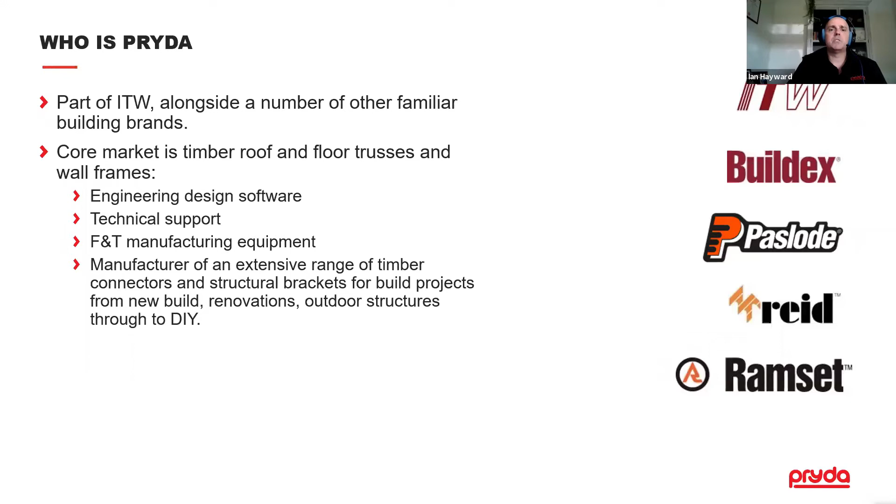Who's Pryda, if you don't already know? We form part of a business called ITW, which has got a broad range of recognisable Australian building names. Our core market is timber roof, floor trusses and wall frames. So we provide engineering design software, technical support, frame and truss manufacturing equipment, and we also manufacture an extensive range of steel timber connectors and structural brackets for building projects and for also DIY and outdoor structures.

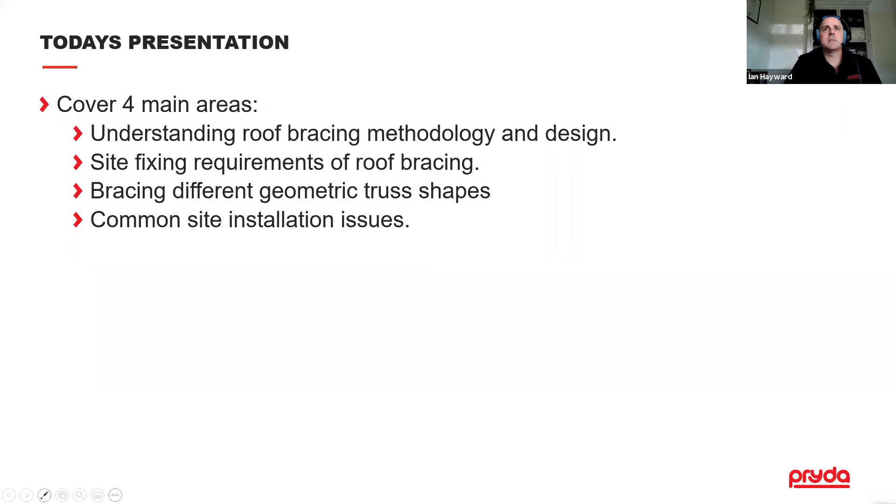Today's presentation, we're going to cover four main areas. The first part is really just understanding a bit about roof bracing methodology and design. Then we're going to move on to some common site fixing requirements for roof bracing. Then we're going to look at some things outside of 4440, which is some different geometric truss shapes and how to brace them, and then look at some common site installation issues at the end of the presentation.

If we look at the legislative requirements first, the building and design or installation of trusses is governed by 4440. It's called up in the National Construction Code, and it's a standard that governs timber roof trusses, timber nail plated roof trusses. So it covers certain building classes, class 1, 2, 3 and 10, and also light commercial. You can use it to get some bracing designs for light commercial structures.

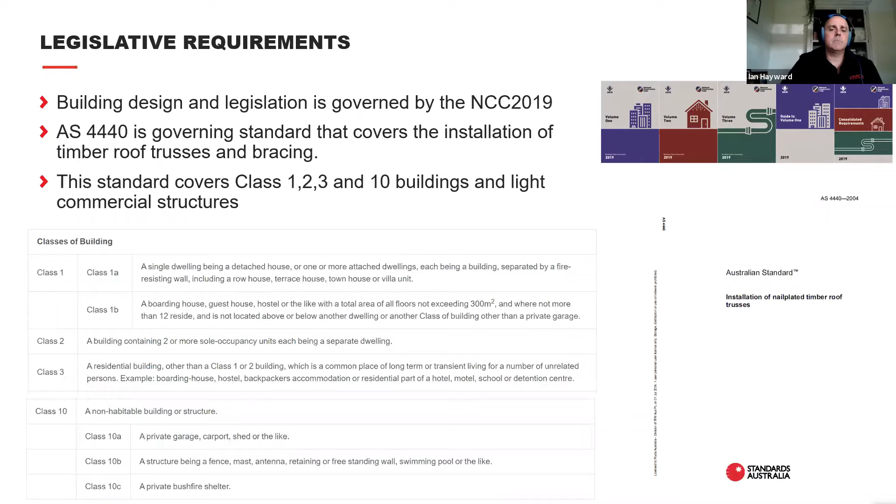What are the scope limitations? These are sort of key things to keep an eye on, because outside of these scope limitations you normally need some engineering guidance. So 4440 has these sort of spelt out in the application of the document. The maximum roof pitch is 45 degrees, so you try and keep the pitch or the bracing below those levels. If you get trusses outside of that, it's always a good idea to source engineering advice.

Maximum truss span of 16 metres. Once you start getting longer span trusses, the compression loads and the chords build up, and so there's a cut-off point at 16 metres for the application of 4440. Truss spacing, so 900mm for tile roofs or 1200mm for sheet roofs in N3 or lower. The reason for that as well is the wider the truss spacings are, the more load it has to carry, the higher the compression forces are in the chords, and the more attention needs to be paid to the bracing and application.

And you're not allowed to use it in snow-loaded areas. Again, seek engineering guidance when you have those sorts of situations, because snow loads can be quite high forces that are applied to the building. It could be anywhere from 100 kilos a square metre to 250 and higher. Again, these create substantial compression loads in the chords, and there needs to be a little bit more attention to detail for the bracing in those types of buildings.

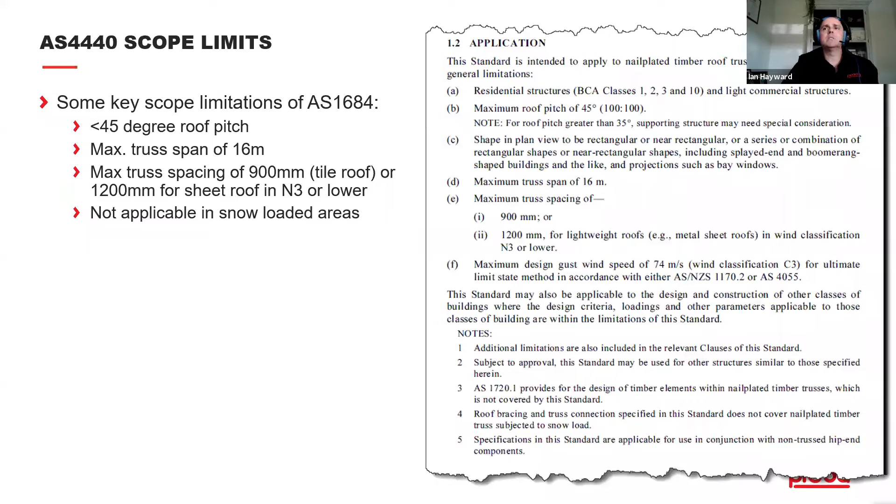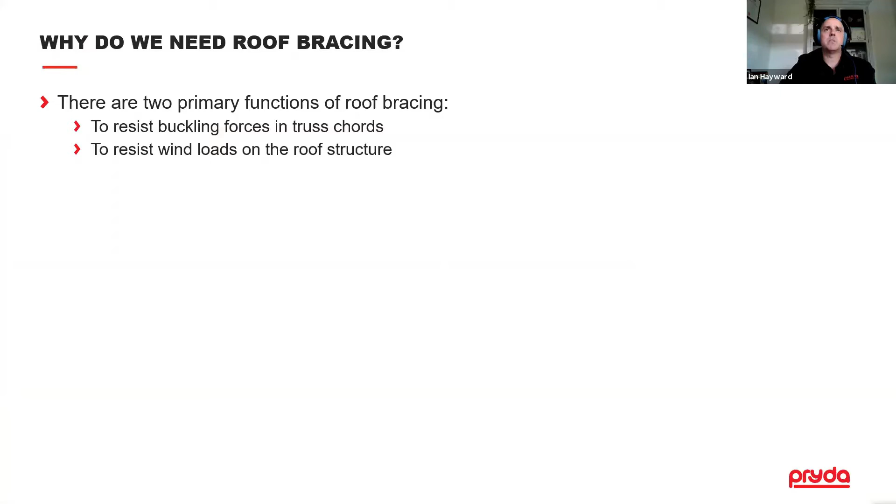So if we just move on to roof bracing methodology and design. The two primary functions of roof bracing is really to resist the buckling forces in the truss chords and to resist the wind loads on the roof structure. We're going to look at both of those in a little bit more detail in the next few slides.

Buckling forces: when you subject a member to compression, it will tend to buckle in the direction of the narrowest width of the member. The more slender a member is, the more susceptible it is to buckling. As you can imagine, with trusses, they're all made of sort of 35mm wide material, so they're actually quite prone to buckling. A good illustration of buckling in action is when you get a ruler and you press it on the end - the tendency for it to push out sideways in the direction of the narrowest width is buckling in action.

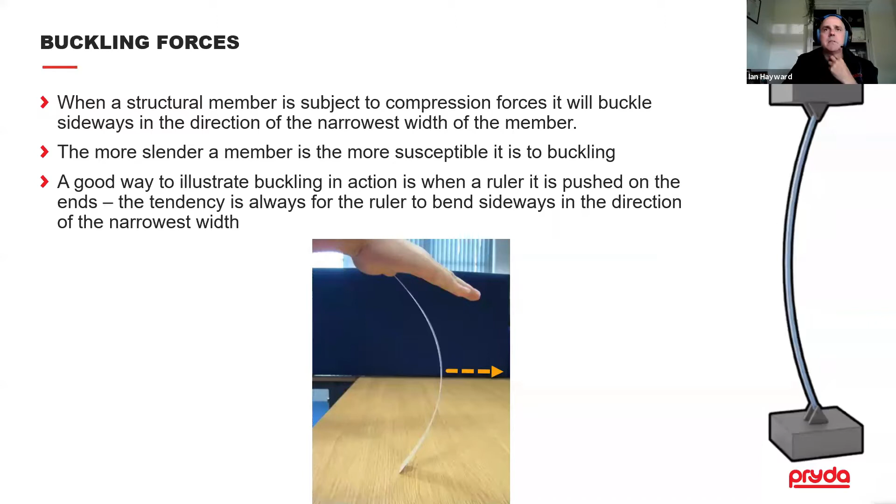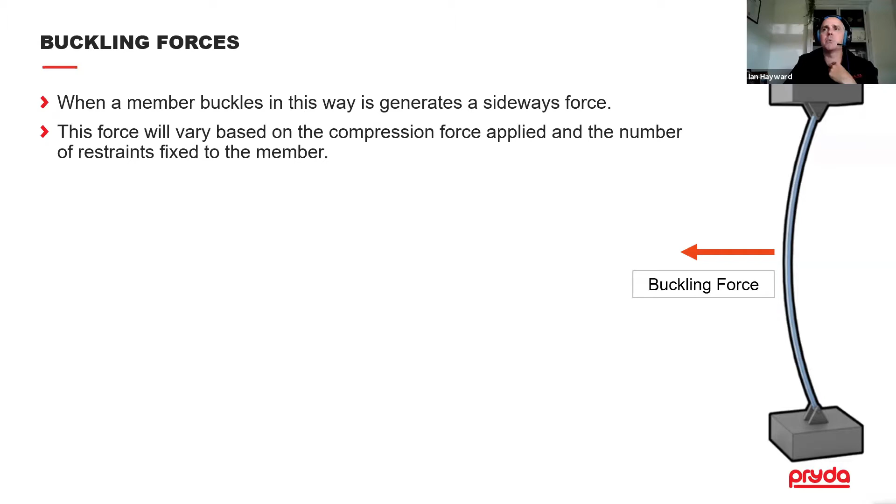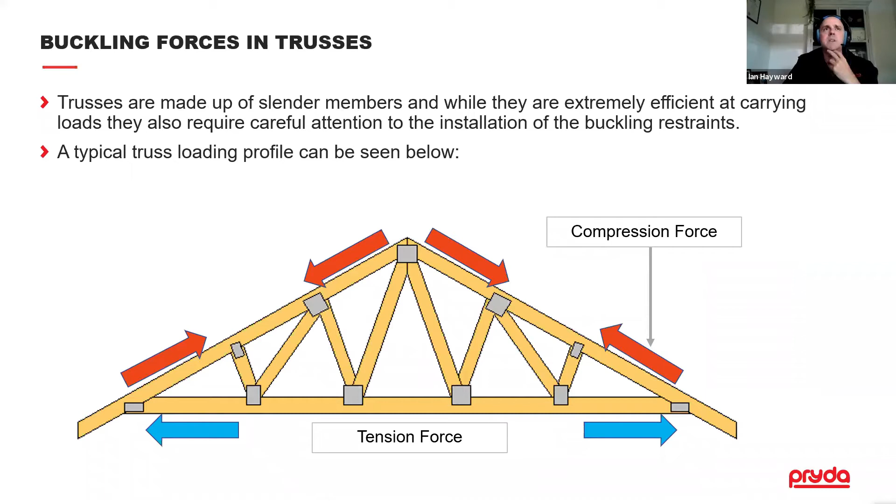When a member buckles, it generates a lateral force, and that needs to be resisted by the bracing system - that's one of the primary functions of roof bracing. If we look at a typical truss, normally in the top chords you have these large compression forces, and normally in the bottom chords you have a tension force. Those forces need to be resisted.

You get the opposite for wind uplift. Even though you've normally got compression forces in the top chords and tension in the bottom chords, when you get a higher wind uplift, that can actually reverse, so you can get high compression forces in the bottom chord and high tension forces in the top chord.

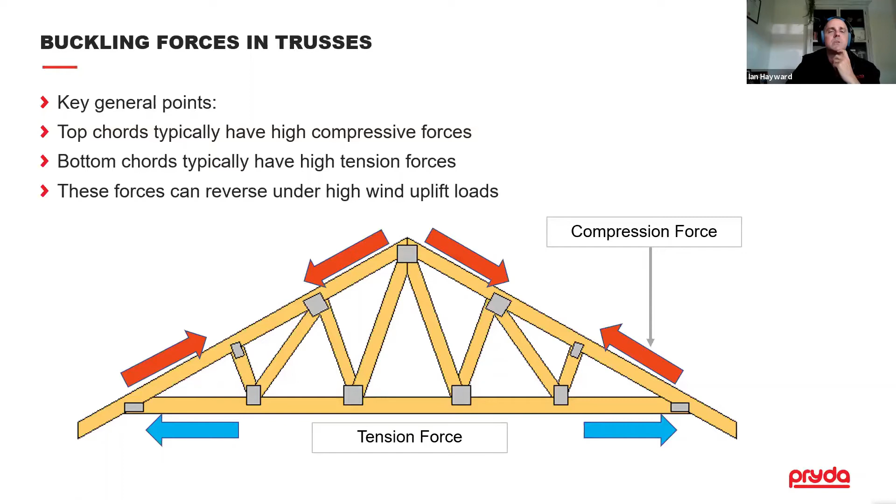Another key thing to keep an eye on is long webs. Slender members like webs are subject to compression forces, and sometimes when they get long enough they may need a buckling restraint, either a mid-height tie or some stiffening, to make sure they don't buckle and fail.

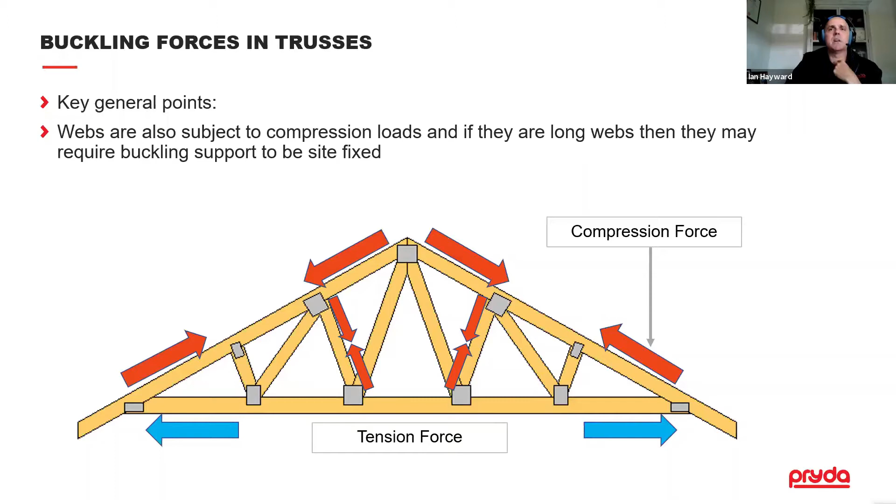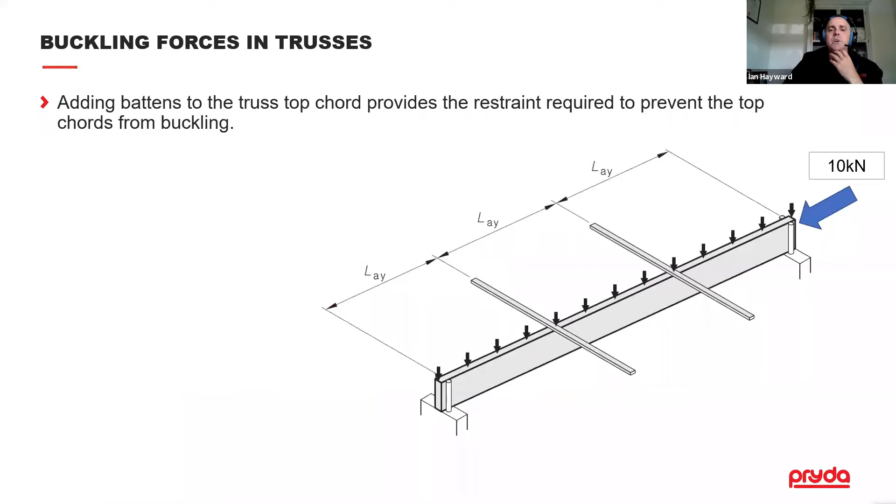The way members in a roof truss system work, once a compression force is applied, the restraint system really comes through the battens. These battens have to be strong enough to resist the buckling forces applied. For loads generated, say a 10 kilonewton compression force in this member, there's a formula in 1720 to calculate the amount of buckling force directed through these members.

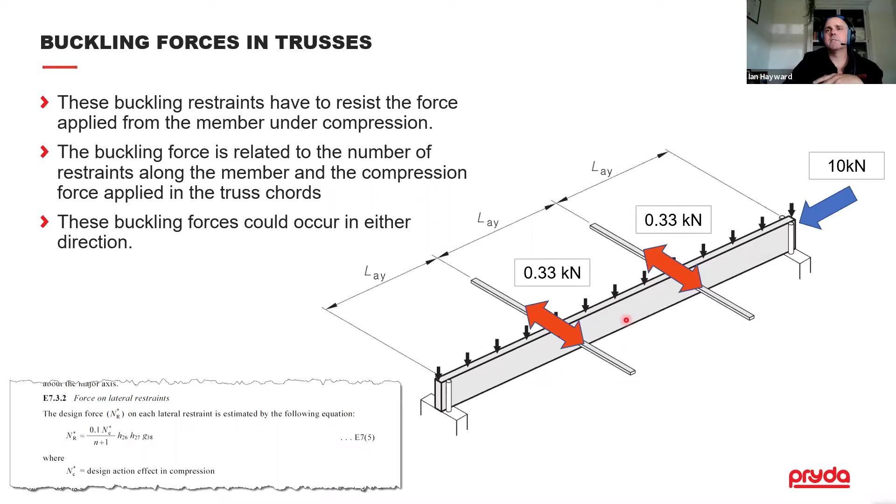It's important to note these buckling forces could go in either direction, so it needs to be restrained in both directions. Another key consideration is that these forces are generally cumulative - you may get the situation where trusses are all buckling in the same direction, and the buckling forces add up for each truss in the direction of the run.

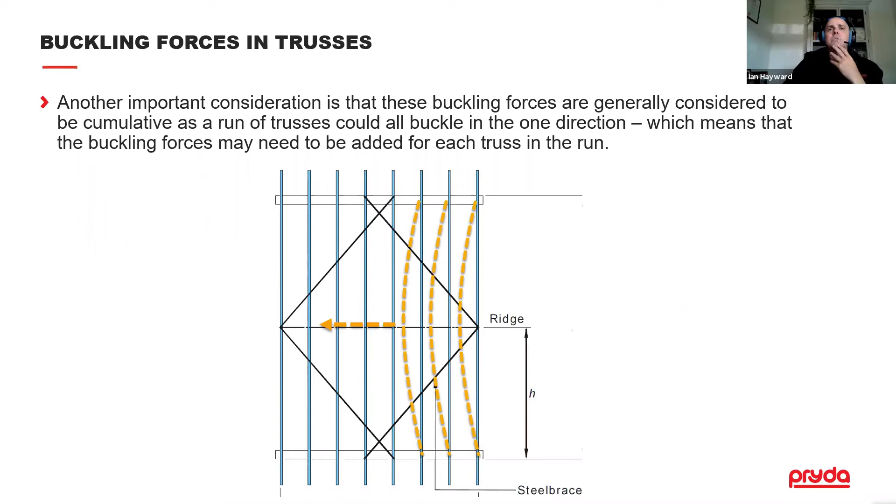The buckling forces are applied to the battens, which are fixed on here, and these forces transfer through the battens, and then when they reach the Speedbrace, they get redirected out to the external wall. These two bits of Speedbrace take the buckling forces in this direction out to the external walls.

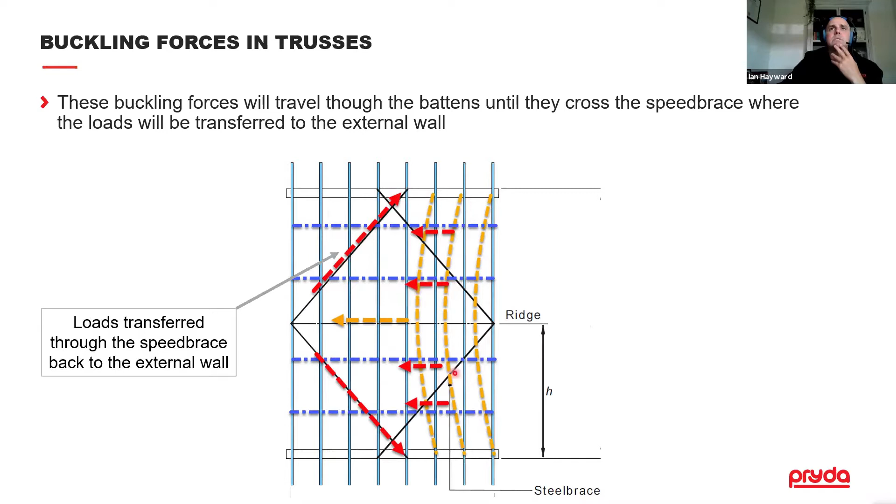Now we'll move on to the wind loads. Part of the application of roof bracing is to resist the buckling forces, and the other part is to resist the lateral wind loads on the building.

You can see here the horizontal wind loads on the roof structure. Part of that comes down into the ceiling diaphragm, and from the upper part of the wall it also comes up into the ceiling diaphragm. Then the top part of this roof gets resisted by the Speedbrace.

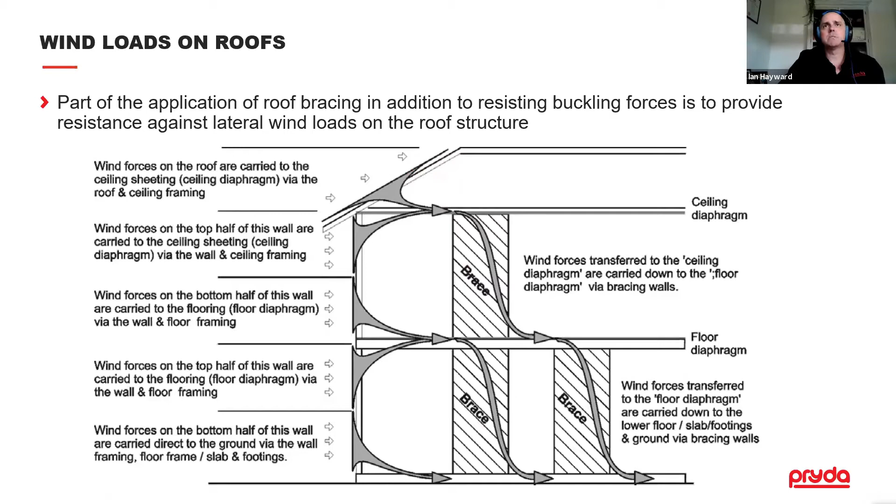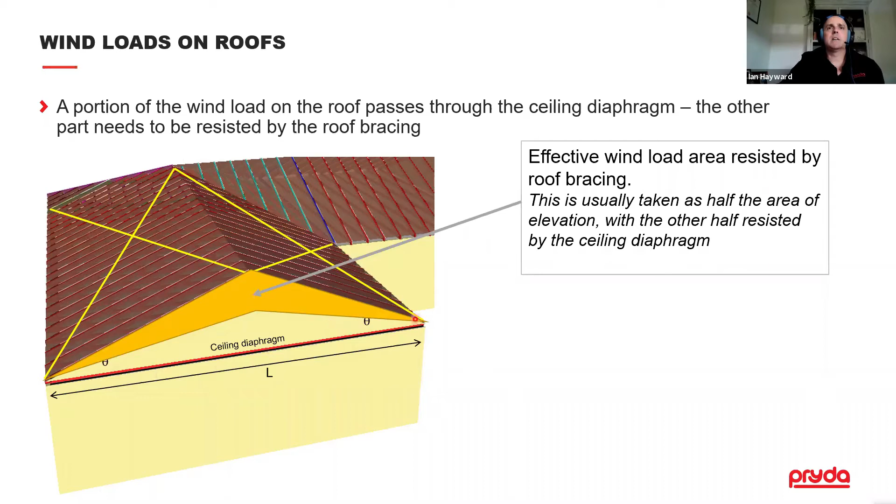Most of the load actually goes through the ceiling diaphragm. This portion down here comes in through the ceiling diaphragm, stabilised by plasterboard, which sits on the bottom chords of the trusses. If fixed direct, that provides the bracing system at the ceiling diaphragm level. The top chord bracing up here is purely for the shaded part of the load, which comes through the top of the roof.

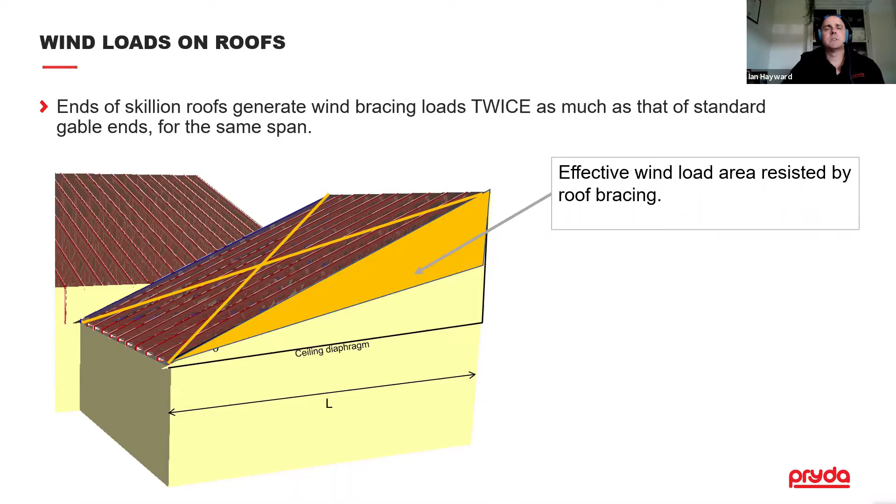Mono trusses tend to have slightly higher loads based on the span because you don't get the reduced area - it keeps increasing as the truss increases in depth, so you may get slightly higher wind forces on a mono truss. Ones with stub ends increase it again because of that starting depth at the heel, which can increase the forces on the building.

A key point for roof bracing: speed brace can only carry load in one direction, that's tension - it can't carry a load in compression. So it's important to always have speed brace installed in a cross configuration to make sure it can cater for wind loads from either direction.

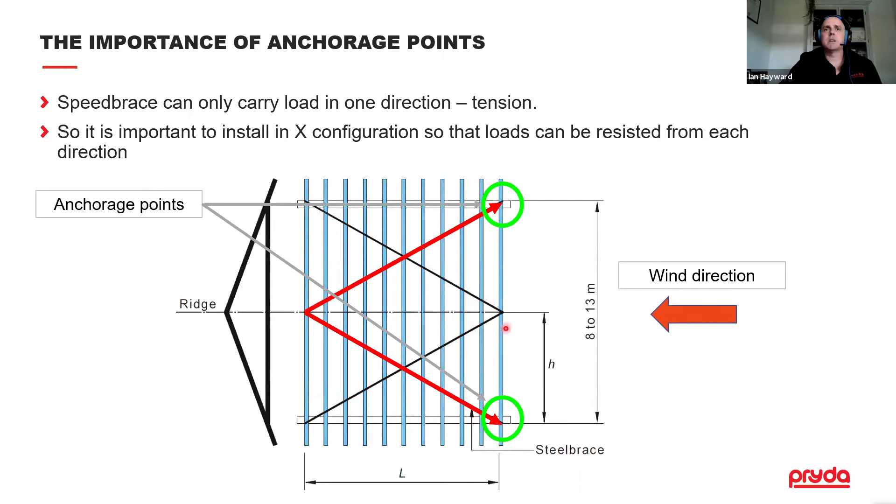Wind direction coming from the right-hand side gets directed through the battens and then taken down by these two bracing runs out to the anchorage points, and these effectively become redundant for that wind direction. When it comes from the other way, then these two become redundant, and these two, once highlighted in red, become activated.

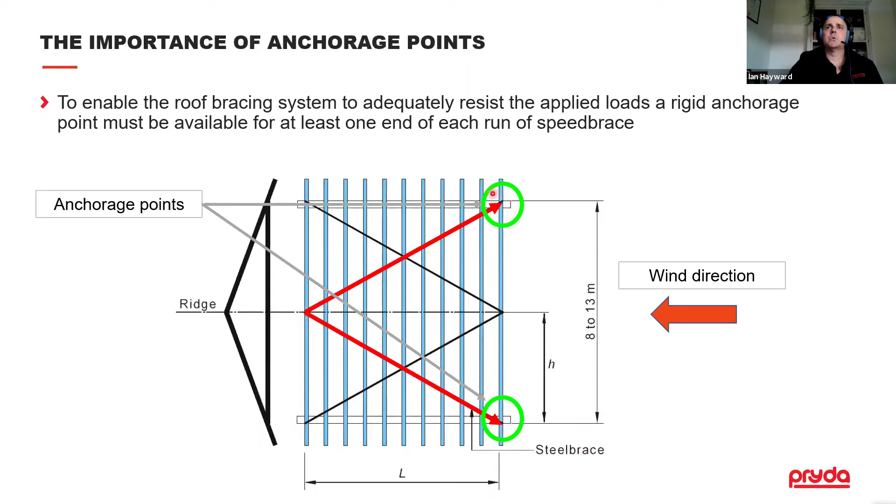With speed brace, it's got to have a rigid anchorage point at one end. Usually the apex point isn't considered an anchorage point - it's where it hits a wall or a rigid point that is considered anchored.

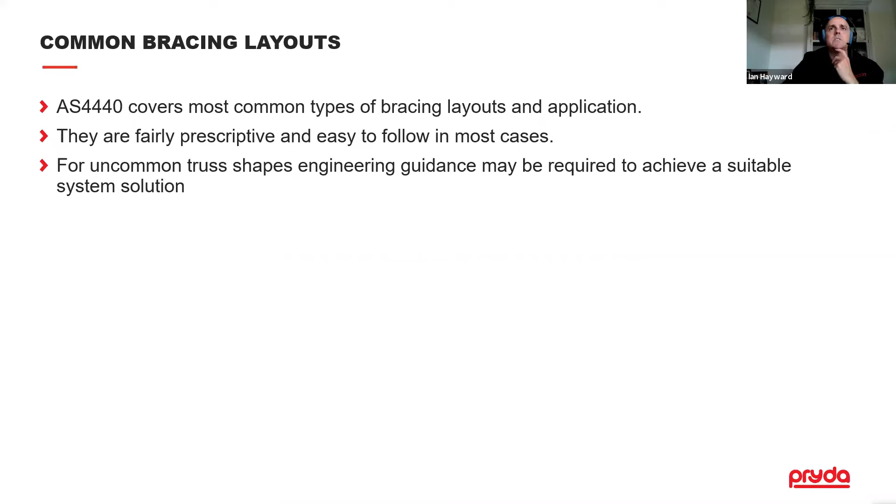If we look at some common types of bracing layouts, they can be varied. It would probably take another full session to cover common bracing layouts, but AS 4440 covers most of the common types, and it's fairly prescriptive and easy to follow in most cases. For uncommon truss types, we'll cover that later, but sometimes it may be an idea to seek engineering guidance for complex truss shapes that may need specialised bracing. But 4440 is pretty standard - you've got your cross bracing in X's on both sides of the ridge line.

The only change is when it gets up to 13 meters, there's a requirement, because the wind forces and buckling forces start to increase, to have additional bracing bays established at 13-meter centres. They're generally single runs of speed bracing crosses with solid compression nogging blocks. The key detail is to make sure these bracing runs line up on each side, with the compression block directly running between them.

The main span of the trusses is also braced in the normal way, and it may be single or double based on the span of the truss, the wind loads, and the pitch of the roof.

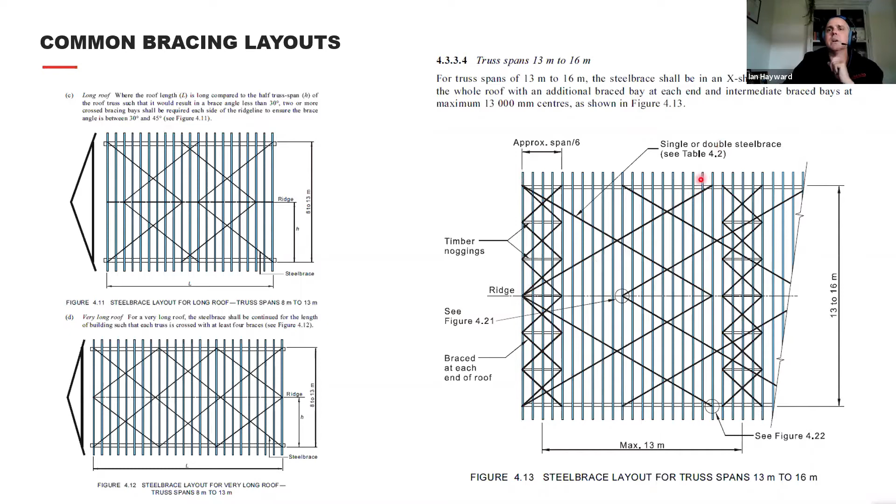So sometimes you don't always have to brace every truss in a job. The ones that often don't require bracing are hip trusses, because they're braced by the supported creeper trusses coming in from each side. TGs and TSs generally don't require it, because the horizontal top chord is restrained by the jack top chord flying over the top.

Valley trusses basically sit on top of the standard trusses, so there's less buckling force in those particular members, so it's not often required to diagonally brace those. The bracing usually runs on the underside of the valleys across the normal run of top trusses.

Boomerang girders are braced by trusses coming in at equally spaced centres on each side, so there's not generally the requirement to brace those boomerang girders.

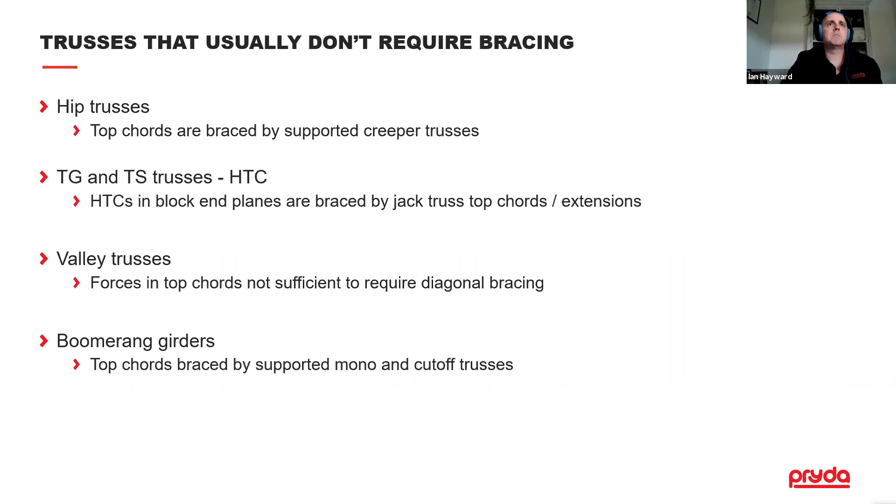So I'll have a look at some of the site fixing details. These details are generally contained within the 4440, covering most of the connection types used on site. It's important to note that the speed brace has to have at least one minimum effective anchorage point to be compliant.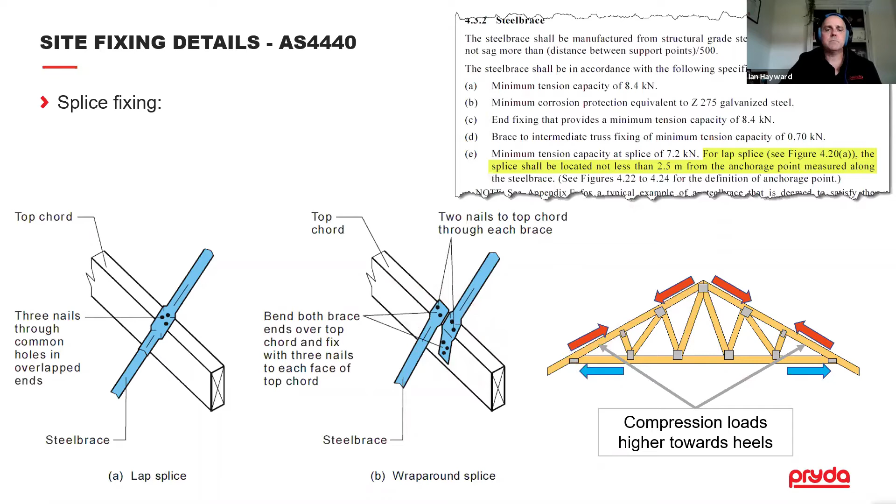Apex of the truss, pretty standard detail - again, the 2 nails and 3 nails down the side face.

When you fix to wall plates, you've got to keep this angle - this is a real critical one, less than 45 degrees. You don't want the speed brace dropping too sharply over the top of the truss. Again, 2 nails to the side of the top plate, wrap it underneath, and 3 nails on the underside.

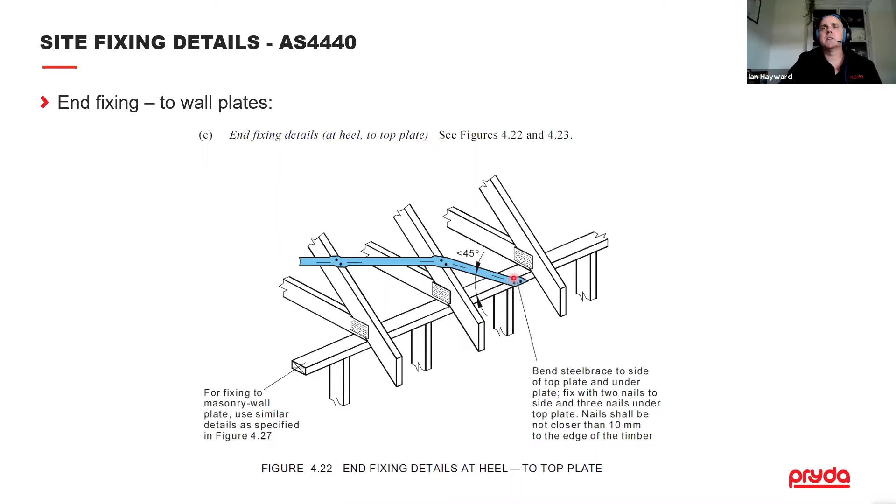There are also some alternate fixing details for those types of connections. Here's one which is good to use - basically 2 nails, 3 nails down the side face, and then a compression block in between the trusses, and this compression block should be on the side of the truss where the speed brace is running. You shouldn't have it on the other side - it should always be on the direction in which the speed brace is running.

And then you have 2 multi-grips fixed to each truss heel. As the load comes onto this truss heel, the truss heel will tend to try and rotate, so that compression block holds that truss heel in place and transfers the force into the wall plate. That's a really good connection detail for steel beams too, because you don't have the opportunity with a steel beam to fix underneath the top plate, so you can put that type of fixing detail in place.

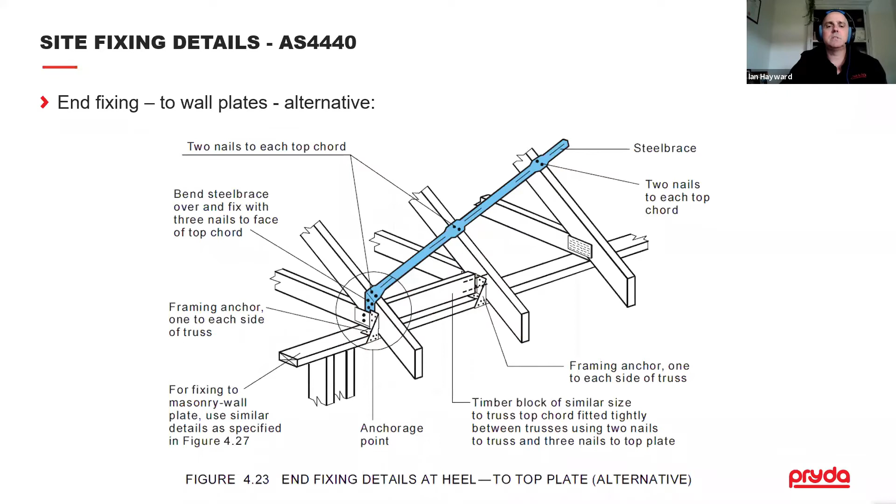End fixing - you can also fix the bottom chords of girders because they've got girder brackets and truss boots which can take these loads from the bracing system and direct them into the bottom chord of the girder. That's considered to be an anchorage point as well.

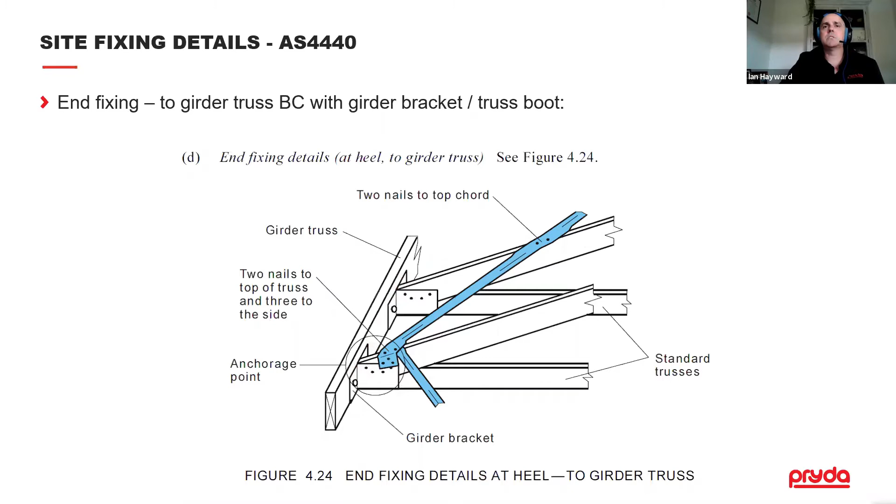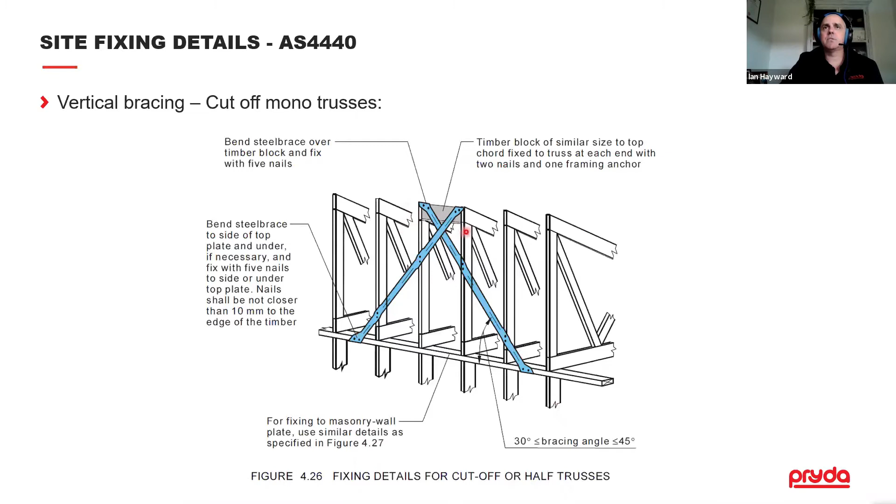Vertical bracing, another one that's commonly missed on site. When you've got cut-off trusses or mono trusses, you should have bays of cross bracing at the vertical ends of the trusses. And when you've got brickwork, you can't wrap it underneath and there's not enough fixings on this lower wall plate, so you can install a 90x45 timber block, fix it off with nails or screws, multi-grip each side, and then you've got enough fixing of nails on these edges of the blocks to stabilize the connection.

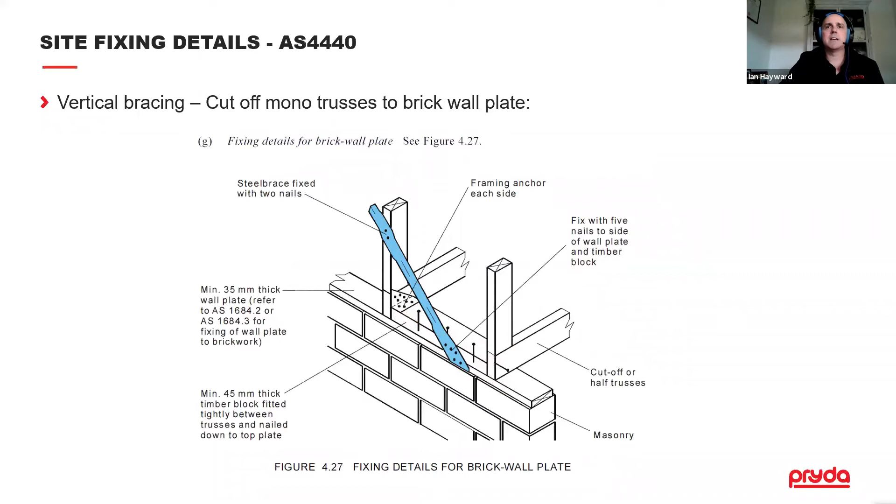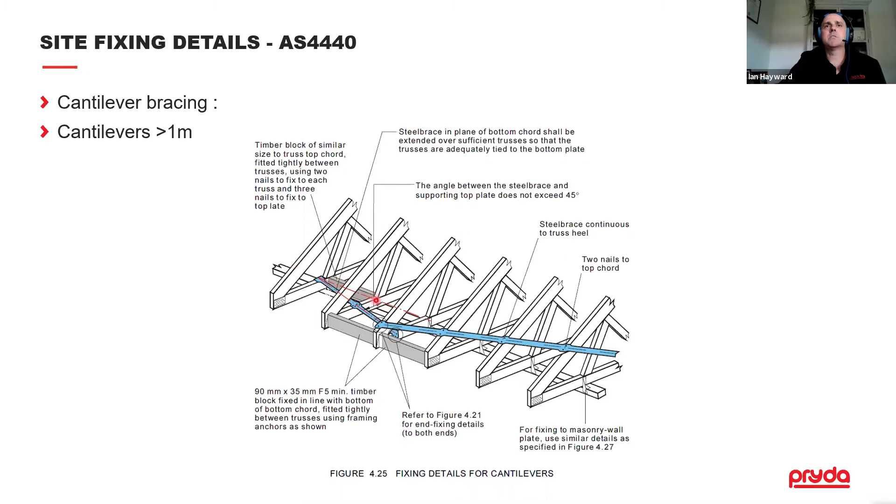Cantilever bracing - generally you're only required to brace cantilevers greater than 1 meter, but these are the sorts of details the standard provides to run the bracing out and then back to the wall. So it directs those forces with this secondary bit of speed brace back into the wall. And again, you can see this compression block in place to direct it in the direction of the speed brace that's running to direct those loads into the wall.

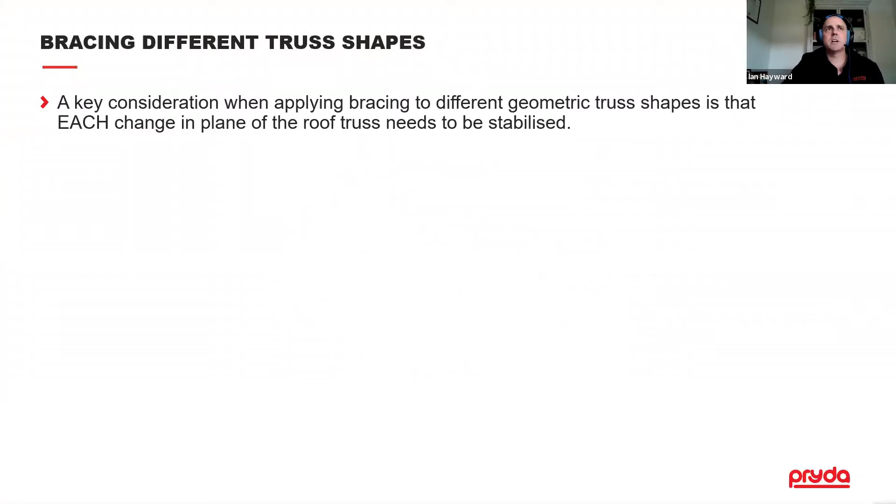So if we look at some common different truss shapes and how to brace them, the key thing to remember when doing different geometric truss shapes is that each change in the plane of the roof truss needs to be stabilized. If we look at a normal standard truss, you've got two bracing planes up to the apex and then down to the heel.

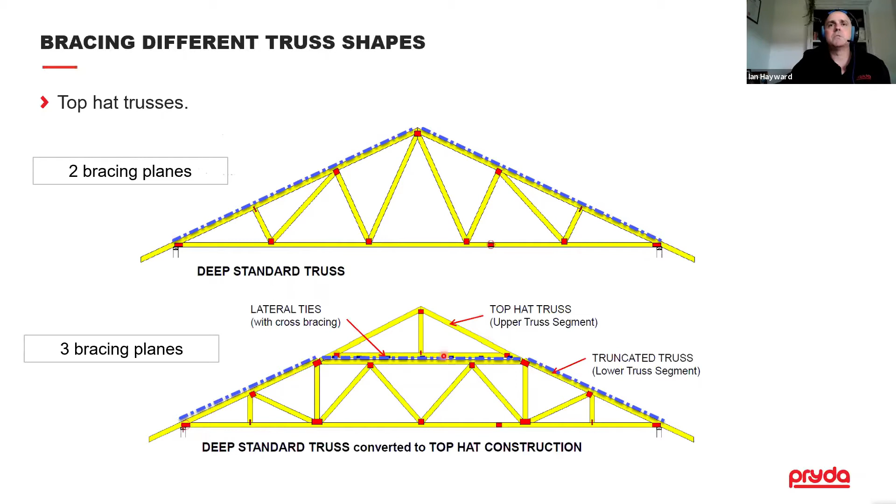So only two there. When you have a truncated or a top-hatted truss, now you've got three. You've got this top plane that runs across the horizontal top chord, then down the other side, and most of the compression load goes through that blue line. It doesn't actually do much - the top hat truss is just sitting on top, not doing much in terms of performance. All the loads come through this horizontal top chord, so you've got to make sure that that's stabilized adequately.

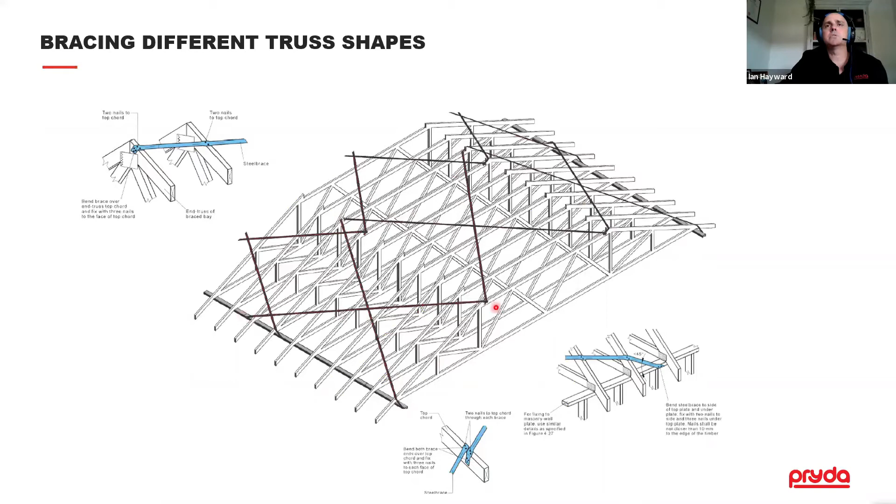So you can see here these bays of cross bracing across the horizontal top chord that run out and connect with these sloping top chord bracing links. So put the bracing in place, and then of course you need your battens on top of that to provide your buckling restraints, and then you sit your top hats on top. A good idea is to just extend these overhangs on the top hat trusses that you sit on top, so you've got a positive fixing between the valley truss and the truss underneath.

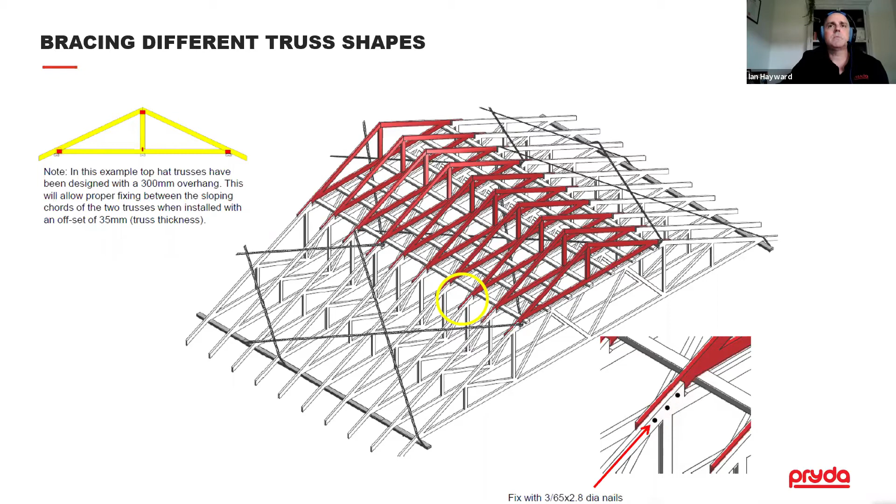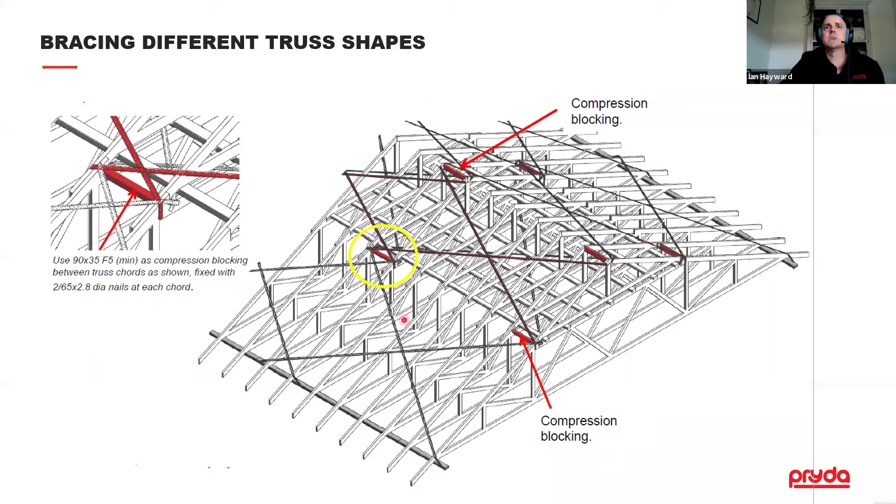The other thing we recommend highly with these types of connections is to offset where the bracing runs lie, because if you try and tie all this into one truss, it gets a bit messy trying to nail and fix these. So if you just separate them with one truss apart and put a compression block in between there, that's usually the best application for these types of bracing runs. You can see these compression blocks sitting at the intersection from where this horizontal top chord bracing meets the sloping top chord bracing on the outside.

Cut off mono trusses, so we covered this before. You can see bays of cross bracing at the high end, and if there was a stub end at this end, you'd have to have it at this end as well. They generally meet at where the roof bracing intersects with the apex of the truss. So you've got one here, one there where this cross bracing comes in, and then one at this end, so the bracing gets directly transferred into this vertical bracing at those high ends.

And normally you'd have this compression block. There's only one shown here, but if you had this bay over 2 or 3 trusses, you'd have to compression block between these points where the vertical bracing is - a continuous run of blocking between those points. And here you can see some typical applications of cut-off monos.

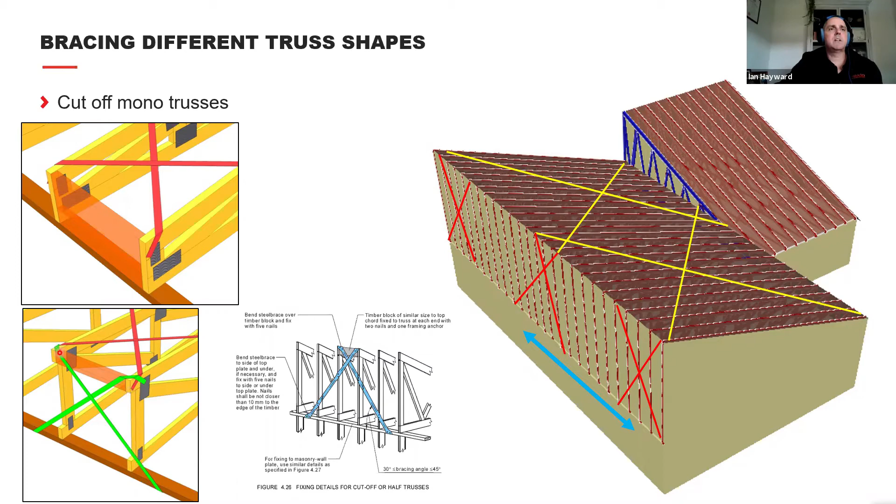If the cut-off mono is quite short, less than 300, you can just have 2 rows of solid blocking there and just brace out to the ends of the truss. If the stub end gets above sort of 350, 400, then you'll have to instigate this cross bracing at the wall.

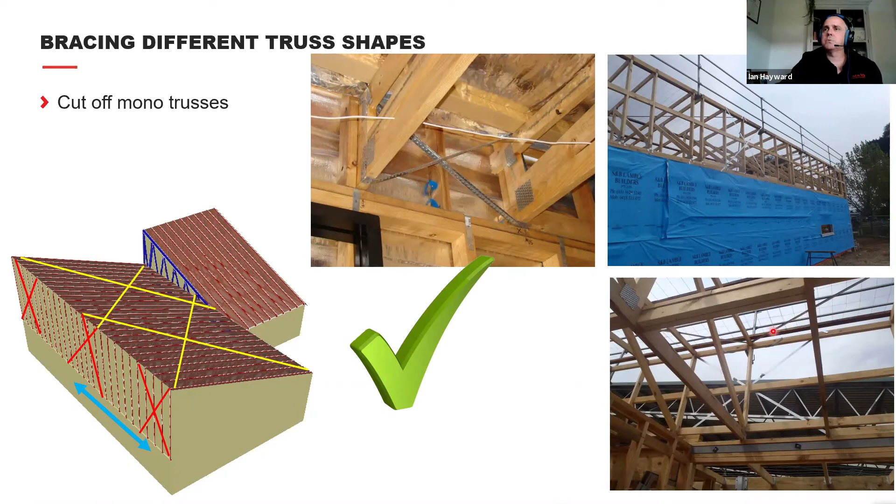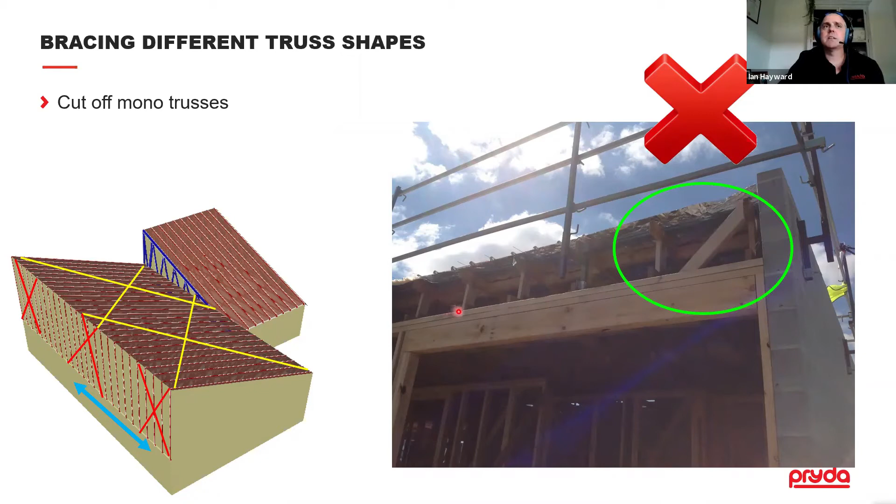Some typical examples you can see from site: cross bracing in place as per the details. You can see one here with cross bracing all fixed off nicely, and another one here - that's it in application. You can see the top chord speed braces coming in at the top here as well, and so that all goes in well. Where you want to avoid is these struts or missing bracing on these ends, because there's nothing there really to resist the pulling force that comes in from the brace on the top chord.

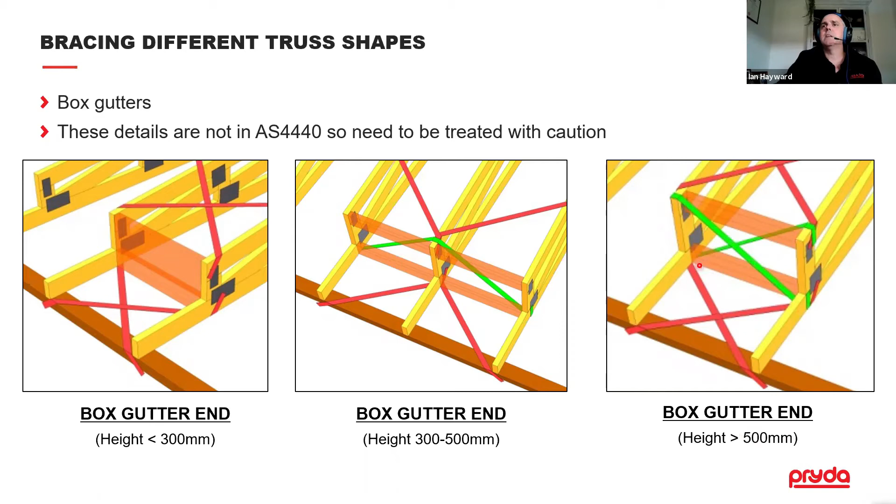So the loads come in through the speed brace, directed through the compression block, and then back out to the wall. And you can see different heights - this one's less than 300 millimeters, so you can get the compression blocking. When you've got 300 to 500, you can have 2 blocks and some bracing input. And then if you've got greater than 500 mil, again you can run with this cross bracing with some blocking at the top and the bottom level.

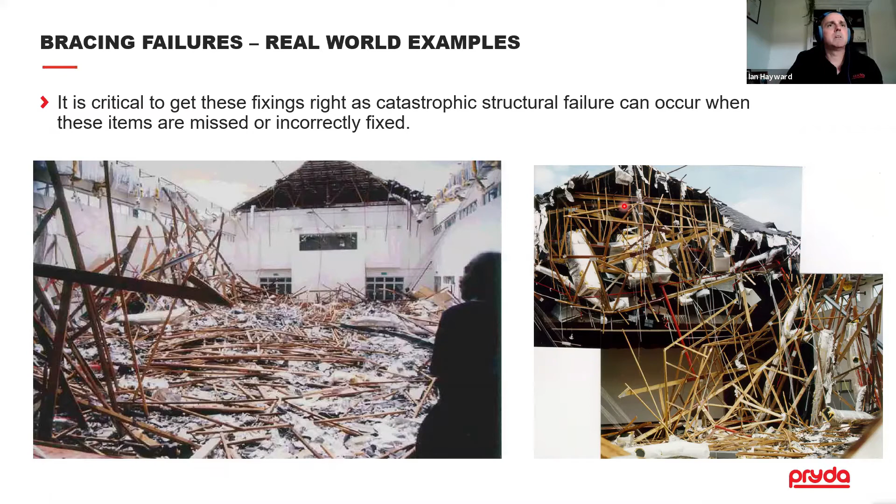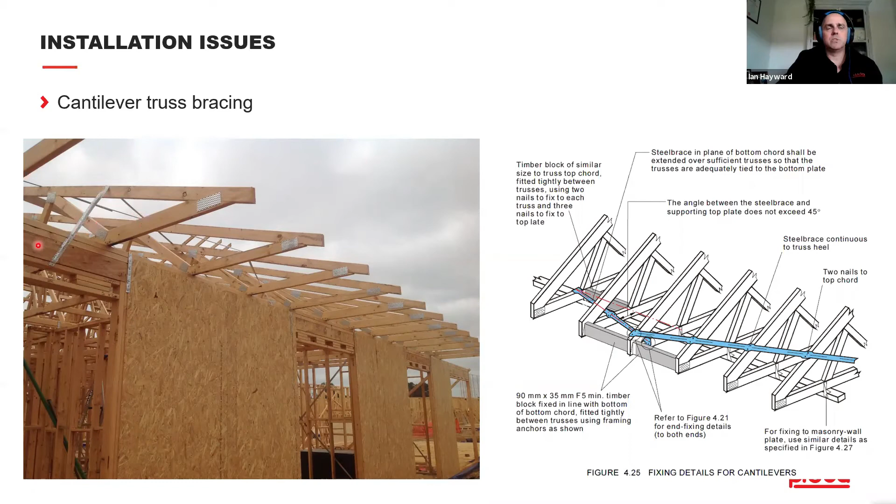What you should try and do is either brace out to the ends and brace it back to the wall, running the bracing out to this end and then back into the wall. Or if it's less than 1 meter, you can just run it over the top of the truss and down through the open space in the void here, directly down out to the wall. That saves you having to hook down at this sharp angle - just run it straight down onto the wall as long as your cantilever is less than 1 meter.

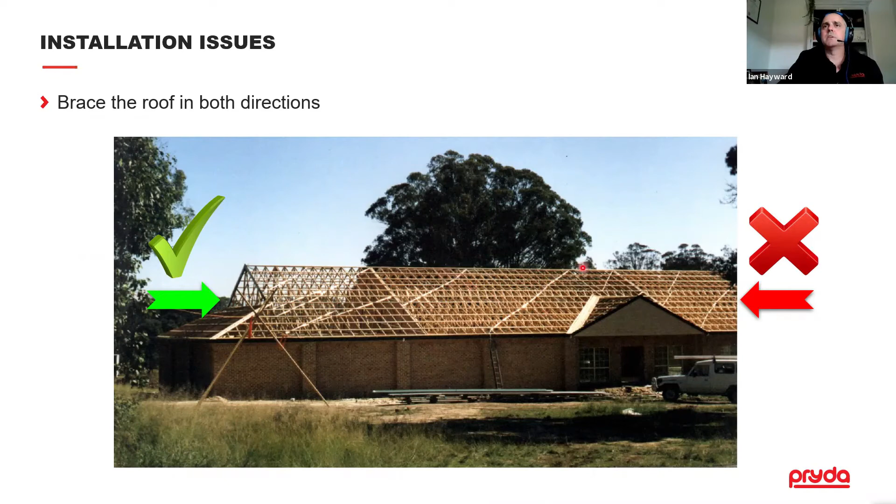Make sure you brace in both directions. You can see a job here where I've got all the speed brace running in one direction. If you've got a wind load from this way, everything's great. But a wind load from this direction, you're in trouble, because as mentioned before, it only operates in tension. So all of these braces become ineffective once you've got a load from this direction.

Use the correct end fixings. They're pretty specific, the details in 4440, and they cover most of the common applications. You just need to get these site fixings right - just lapping it onto the top plate with one nail is not cutting the mustard.

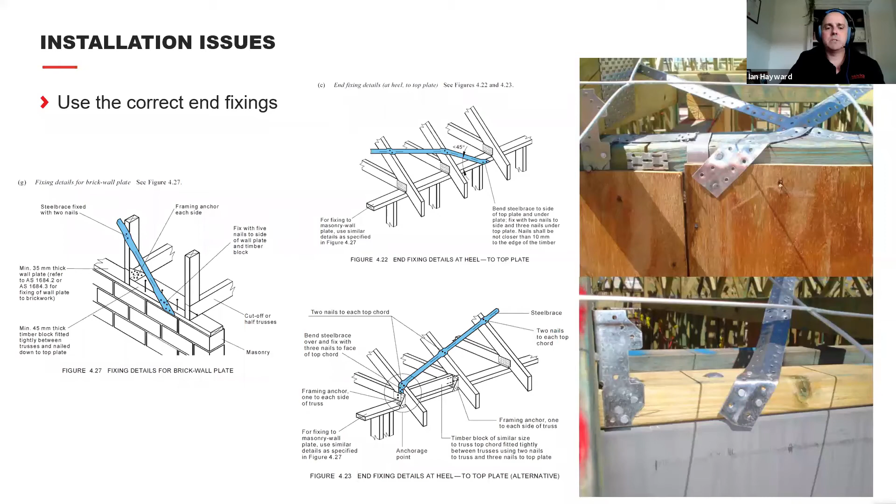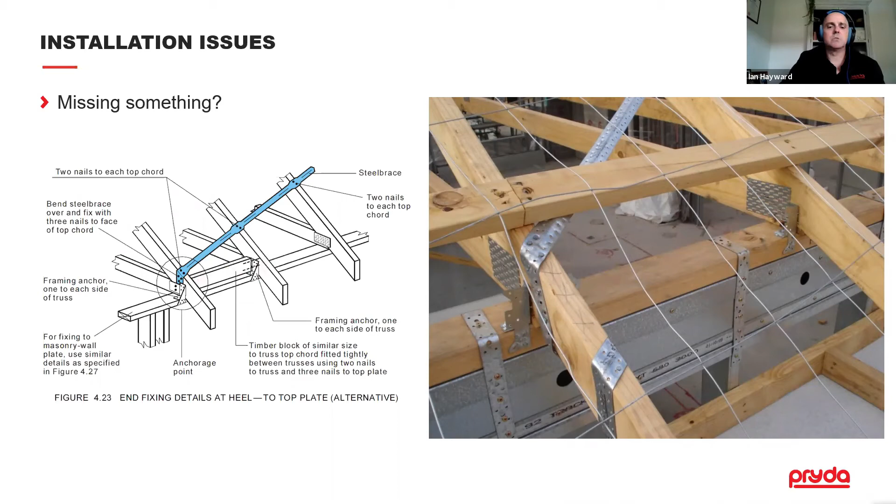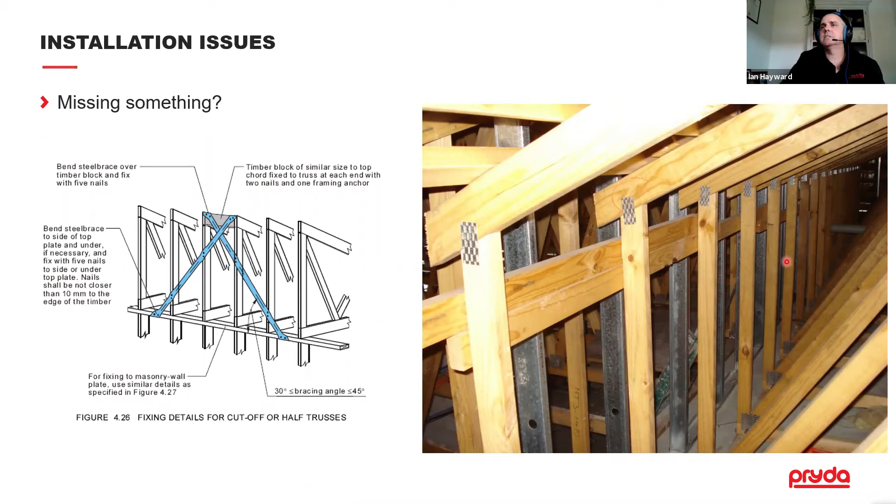Vertical bracing is often missed on site. You can see a run of cut-off trusses here - they've got the temporary bracing in place, but they've forgotten the speed brace. So just make sure that on those runs of cut-off trusses you have at least a bay of speed brace vertically at least every 9 meters. Usually try and start it at one end and put one at the other end, then at intermediate 9 meter centers to make sure it's all stable.

And that was the cause of a roof collapse in South Australia a number of years back. It was up in place for 9 years. They fixed the roof battens, terminating all the battens on the end of the girder, and the nail fixing was too close to the end. The batten split, and over time the battens pulled out. Eventually, 9 years after it was installed, it collapsed and killed 3 people.

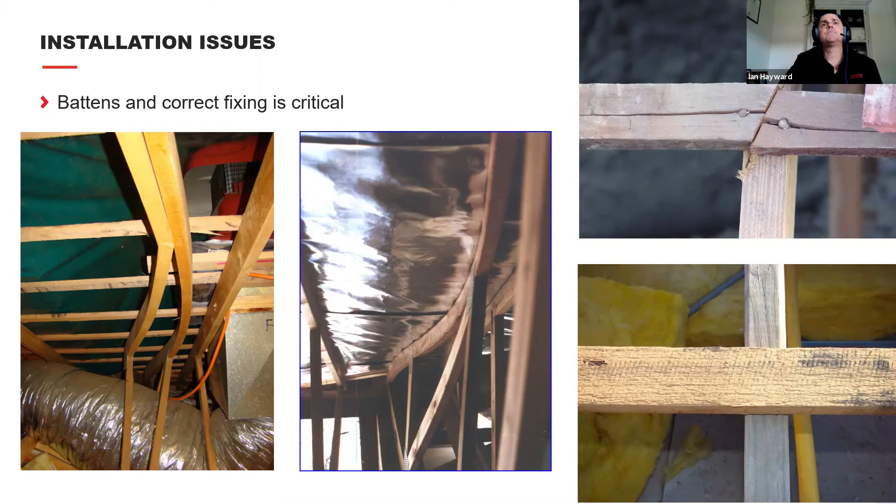Splices on top chords - the standard requires you not to splice adjacent to each other, and only 1 in 3 batten splices on any one top chord. That's applicable for all standard trusses.

No splicing is allowed on girder trusses, and the battens have to be fixed to each ply of multiply laminated trusses. Of course, if you've got a multiply truss, you're going to have much higher compression and buckling forces, so you must have those fixings to each laminate, otherwise you run the risk of the chord actually shearing the nail off through the batten. So make sure they're in place.

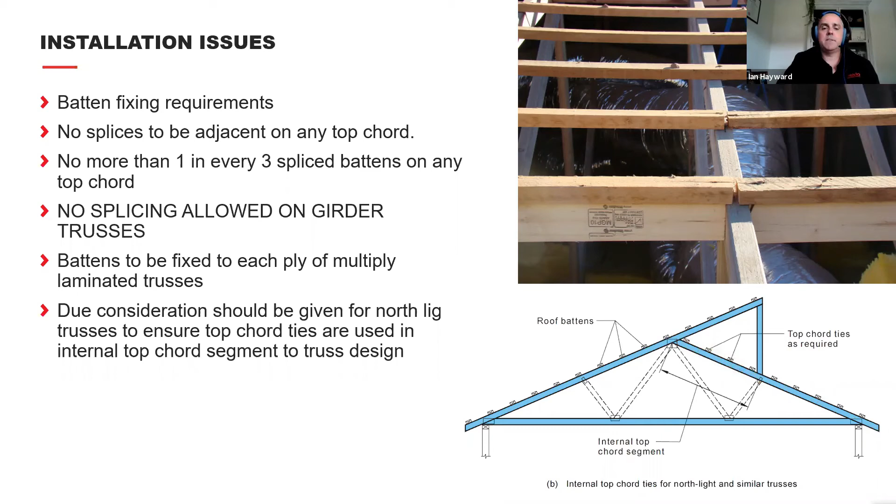You also need to make sure in areas where you've got parts of the top chord, like in a north-light situation, that you've got those buckling restraints still in place on these sections of the roof. Even though you may not have sheeting there, you've got to make sure those restraint mechanisms go in place and are fixed off properly, and the speed brace runs up into those areas as well.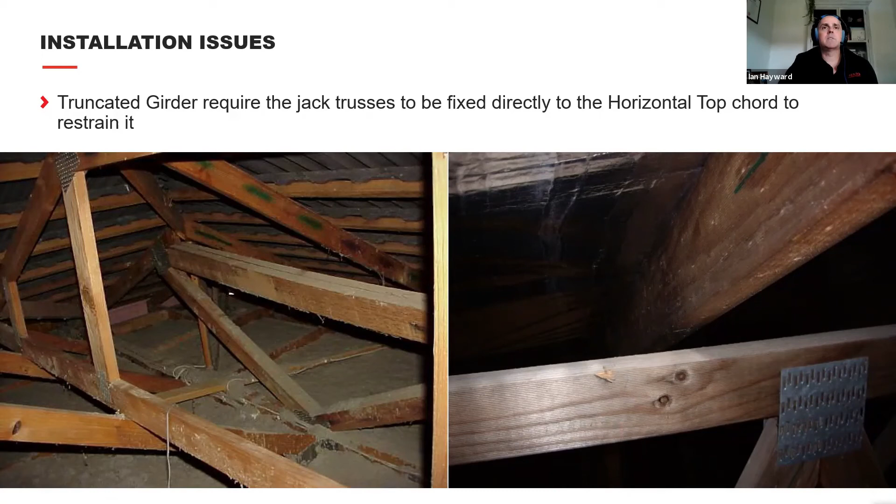And we touched on this previously, the web ties. You can see here fabricators provided stickers on each one of these members saying 'please brace me.' They haven't gone in, and of course the webs have high compression force, and because they're so long and slender, they failed in buckling.

This is the detail from 4440, the typical web tie bracing schedule - basically a batten or web tie run along the mid height of those webs, with cross bracing running between the top and bottom chords, and a bay of that needs to go in each run. If you have staggered web profiles that aren't all aligned, you need to switch to another mechanism for stabilizing the webs, either a T-stiffener or a side scab to the web.

So those are other options, but this is the most efficient when you have a common run of web profiles, all the trusses the same shape. This is the easiest and most effective, cheapest way to resolve those buckling issues for webs.

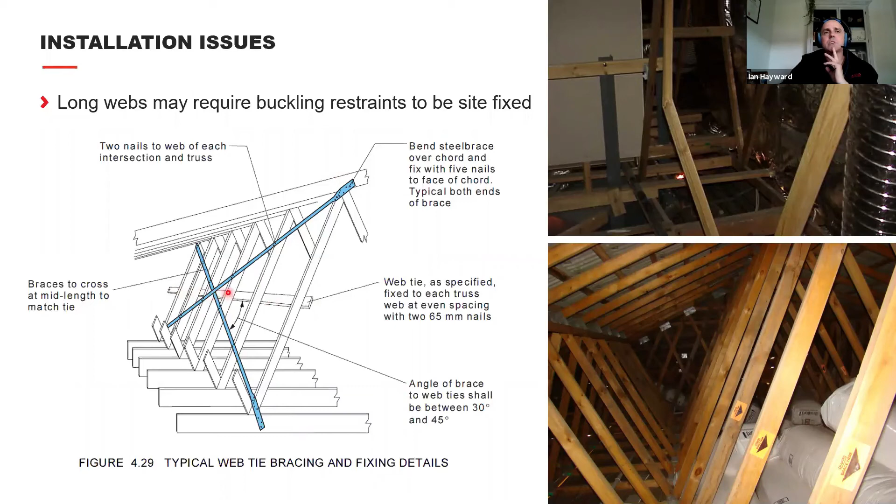So do the small cross braces, the X's on the 13-metre truss bracing, need to be doubled? Sometimes they do, yeah, it depends on the truss span. There's a set limit in 4440 - it depends on the wind speed. The higher the wind speed, the more critical it is to have cross bracing. Generally, the bays of bracing may not require it, and it's usually the top chord bracing that has the doubles. But it just depends on the type of job with those sorts of things.

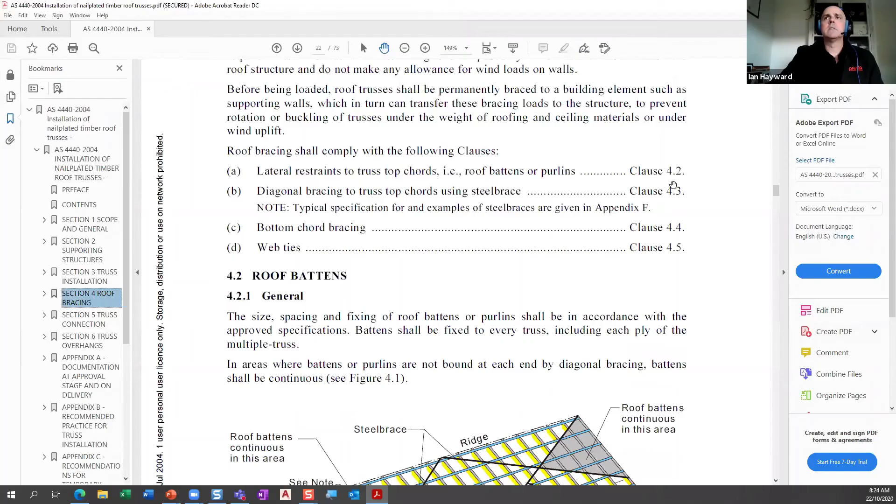So I might just see if I can get the 4440 up here for you. I had a copy open before. If we scroll down here to the applicable section, you can see it gives a table in 4440 with the wind speeds and the roof pitch.

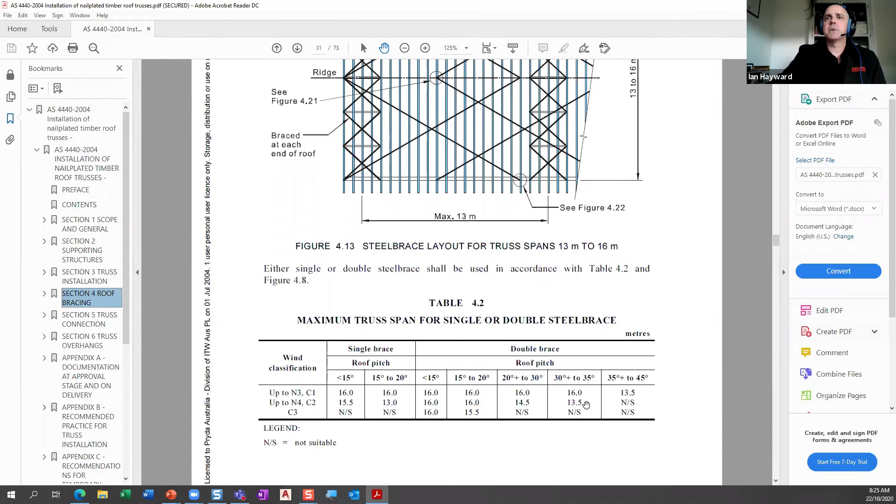Below 20 degrees and up to N3, you can have single brace for 16 meters. Once you start going to the higher wind speeds and these steeper roof pitches, you get a reduction in the span, so they need to be doubled up. In these higher wind speed zones, the span length becomes reduced where you need to switch to double speed brace.

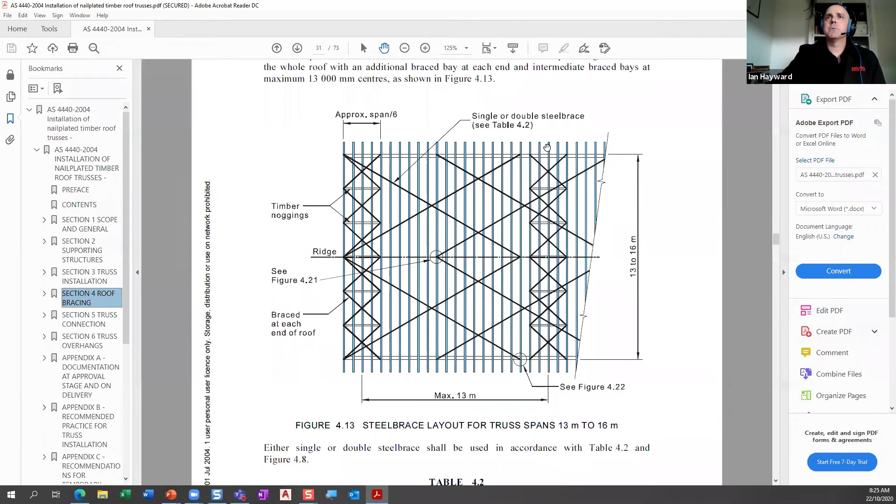Okay, so generally I just brace those with single, and then that's the main run of speed brace through the main parts of the building that become potentially doubles.

And what about really short trusses, e.g. a 500mm truss? Does it need to be braced? No, generally not. Our software actually does a calculation on the length of the member and the compression force in it, and it'll warn the user if there's an issue with the buckling restraint. It usually flags it prior to the job getting to site that there may be special considerations for buckling, but normally unless it's really short or low, where it can happen is with short or low girder trusses.

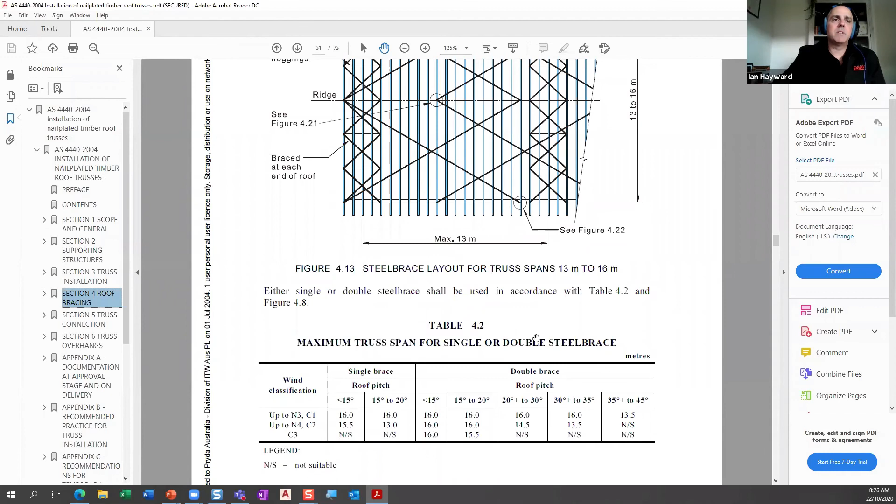So if you've got a really short top chord span, what we generally recommend is a detail we supply, putting nogging blocks in between the truss chords and then a short run of speed brace over those particular trusses. But in general, a standard truss with a 500mm length isn't going to generate enough force to cause issues. It's really girders, highly loaded, low pitch girders that may need occasional attention to detail. That generally gets flagged in the software, and they come to us and ask the question, and fabricators will normally supply that on the layout to notify the builder.

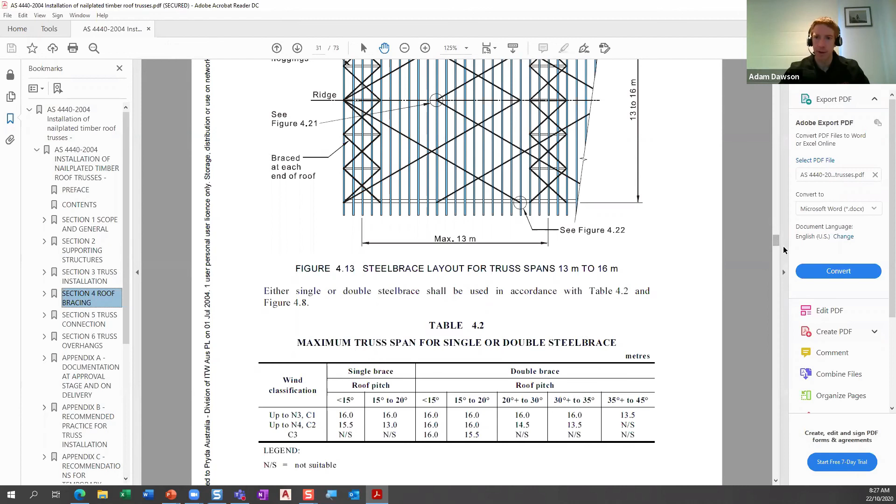I have one more question about bracing details for layout. The bracing details you showed, are they available for detailers to put on layouts? Yeah, they are. Generally a lot of the detailers use those graphics and plug them onto their layout so that they're available to our fabricators for use.

There's a question about ceiling bracing. Generally what happens is with ceiling brace, the plasterboard actually provides that restraint mechanism for trusses. So as long as the plasterboard is fixed direct to the trusses, that provides the buckling restraint for wind uplift. When that mechanism gets removed, if you have a suspended ceiling with furring channels and clips, all of a sudden you lose that buckling restraint for bottom chords, and you need to find another mechanism to provide that restraint.

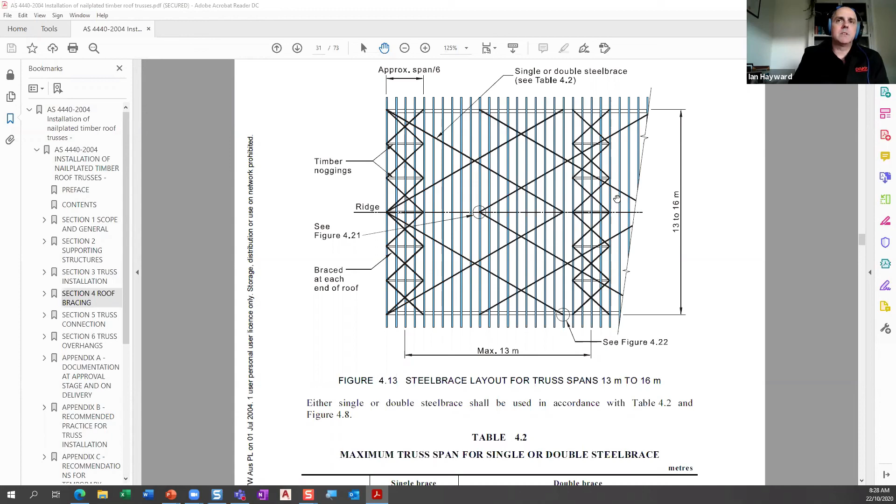The standard actually has that specified, and I'll show you where it is. You can see here it's very similar to the roof bracing, and what you have to do is basically run it in these diagonals, and the designer has to be informed. So when you have those sorts of situations, you need to flag it with the fabricator, because they need to design the trusses with these restraint mechanisms that are different to plasterboard.

So they might be bottom chord ties that run through the building, and when you have those suspended ceilings, those need to be noted on the plan to make sure the designer is taking that into consideration when doing his truss designs. That buckling restraint for the trusses is usually a similar mechanism to the roof bracing, except that it's applied on the bottom chord of the trusses.

Now, one key thing to note is it's not a building stability detail. It's only to do with the buckling of the trusses. So once you get a suspended ceiling, as soon as that drops away, there needs to be another mechanism put in place, which is either wind trusses or some other diaphragm system to stabilize, and it's not the trusses, it's the walls.

When that wind load hits the walls, usually it gets directed through the plasterboard and out to the bracing walls. If you don't have that mechanism in place, like with a suspended ceiling, you need to substitute it with something else. So this bracing only takes the buckling forces from the trusses, it doesn't take the wind load like the roof bracing does. That's the key distinction between those two.